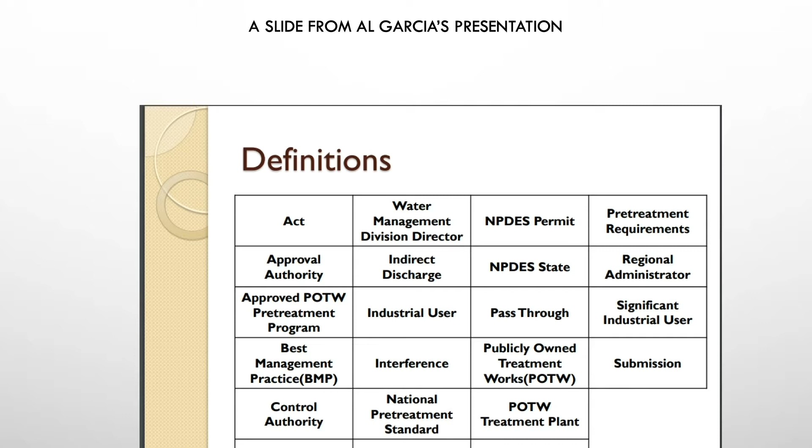A little disclaimer. Like I said, we've been monitoring, as far as I can tell, from 1991. It might be later than that, but I've only been with the city of Bismarck from 2006 on. So I try not to talk too much about things that I wasn't there for. This industrial user has always been cooperative. And they actually asked us to write them up for an NOV because that was going to help them to go to their headquarters and say, hey, we need to improve treatment.

They were a little hesitant when I asked if I could use them as an example, and I've made as much effort as I can to keep their name concealed. If for some reason I missed it, I noticed that there's one place where it says it on the top of the gray out. I apologize for that if you guys see that. And like I said, Bill's going to have some input, and I'll call on him.

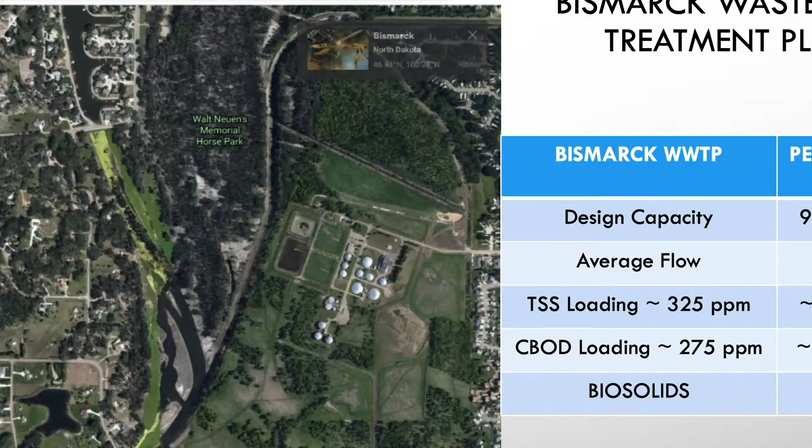So a little bit about the Bismarck wastewater treatment plant. Our design capacity is 9.3 MGD. You can read it. The loading, CBOD loading. We do our biosolids and land application. You can see the Missouri River, I think, along the upper part of the slide. Here's the treatment plant.

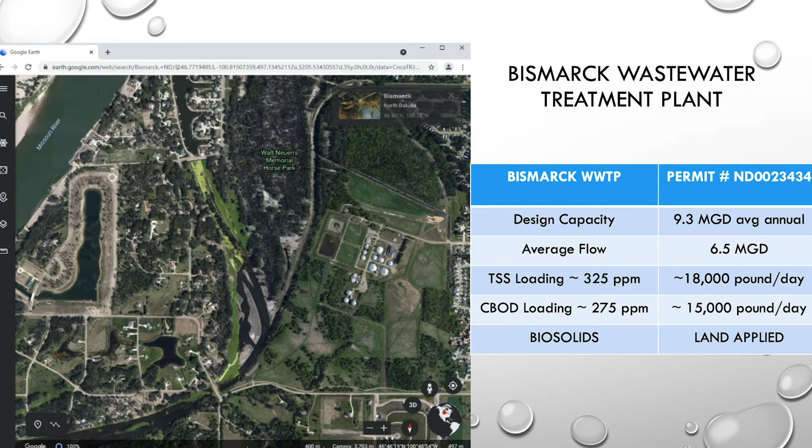And I just did a quick search. The Missouri River gets its flow from the Garrison Dam. So Delron, that's where we were fishing. The Garrison Dam releases about, today, 13,600 CFS, which is about 6.5 million gallons per minute. We got 6.5 million gallons per day. So you can see we've got a huge receiving stream. I would imagine some of you would love to have a receiving stream similar to what we have.

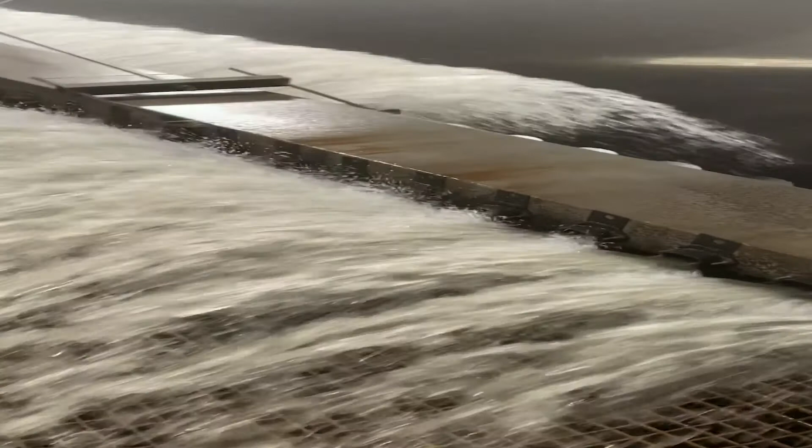We use trickling filters, and of course this slide, well, it'll play. It should play when I turn it. There it goes. So this is a trickling filter. Show of hands, how many people in this presentation do not actually work at the wastewater treatment plant?

Okay, here's my lame joke. Not relevant, not elephant relevant.

Well, it's relevant because you need to know how your treatment plant works, how your discharge permit is written, what your ordinances are, because that helps you when you do your permitting for your industrial user, because it all comes back to that. So how does it relate to 403? Talking about the 25,000 gallons per day or more. Of course, we all know that. And the 5% loading and all the other categories. But if you don't know how many million gallons of water your treatment plant gets a day, you don't know where you're at on the percentage, your loadings and those kinds of things.

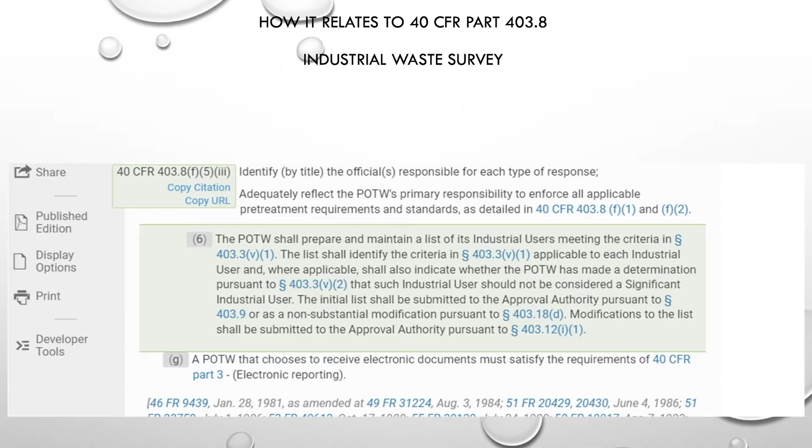Of course, you have to develop a pretreatment program as required by 403.8, which is why we're all here. If you didn't have a pretreatment program, you couldn't enforce any action on an industrial user, right? If you didn't have a city ordinance, you couldn't enforce limits on an industrial user. So you have to have that legal authority, as it was in Al's presentation. And of course, you have to do your industrial waste survey as required by 403.8 F1 and F2. I wasn't going to go that far down, but Sarah got us started on that.

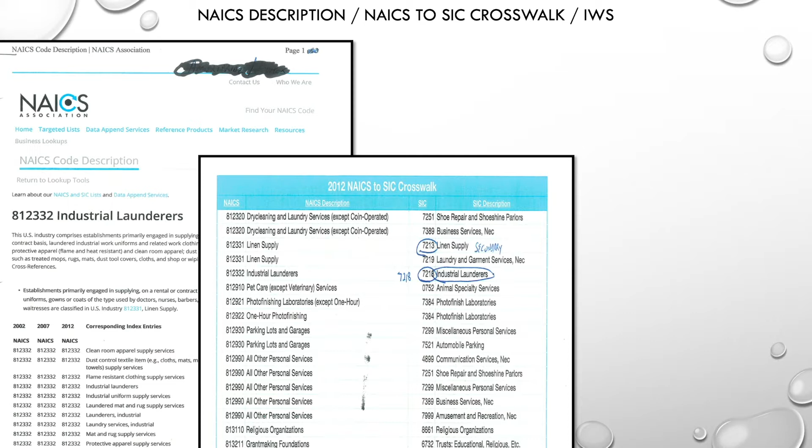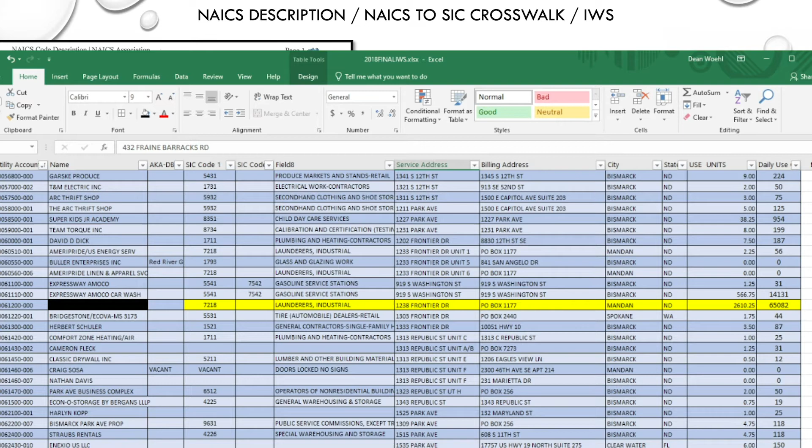So let's look at an industrial user. Here's an industrial laundry, and that converts to a 7218. And this is our water billing. So this is my industrial waste survey showing that they actually use 65,000 gallons of water a day. That's water usage, not water discharge or process discharge, but it's pretty close. So of course that's greater than that 50,000 that Adam showed you, and it's greater than 25,000. So that means we have to monitor them.

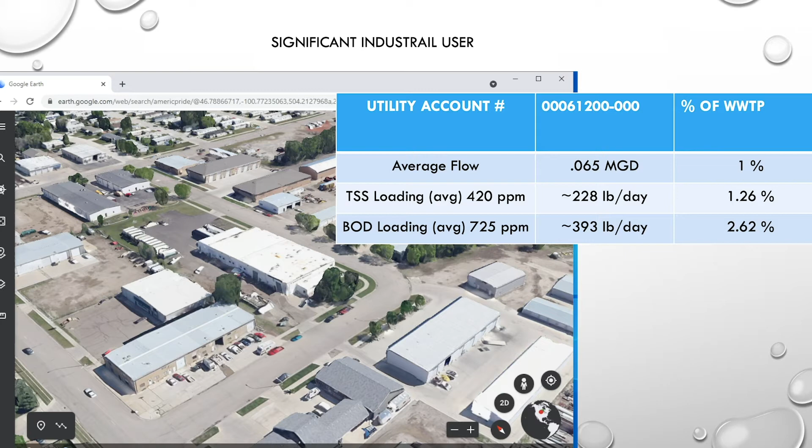And here is significant industrial user, Anytown, USA. Their average flow is 0.065 million gallons, which is 1% of our flow. Their average loading is about 420 parts per million, which is about 228 pounds per day. Still, 1.26% of our loading. Their BOD, I should stand over here. Their BOD is 725. This is the 5-year average, which is about 400 pounds a day, 2.5% of our loading.

And of course, we issue them a discharge permit, just like we have a discharge permit to the river, your standard boilerplate discharge permit, with their limits, including the nonylphenols and their lead and coppers and cadmium, chromium. This is all out of our city ordinance and from our local limits sampling and local limits development.

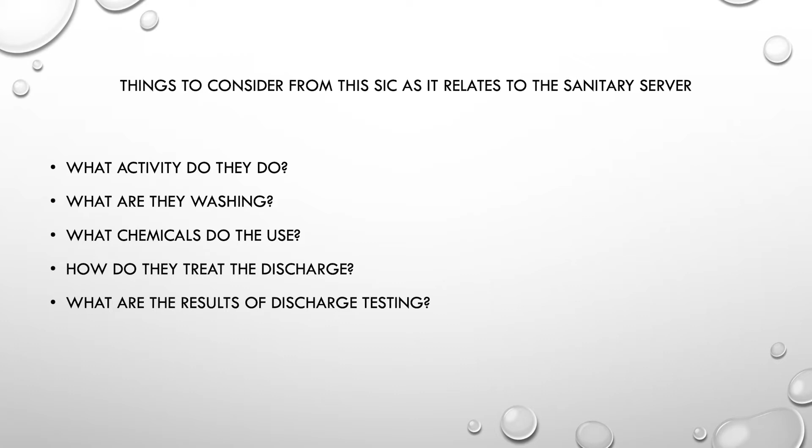So things to consider. This is kind of similar to Adam's third slide or so. What activities do they do? What are they washing? What chemicals do they use? And how do they treat their discharge? And what are the results of their discharge testing?

So doing your inspections, of course, we're looking at their processes, how many pounds of laundry are they washing. And this is going to come from your yearly inspections. There's a reason you're supposed to do your yearly inspections. There's a reason why your discharge permits should only last 5 years. Because if you find something of concern in your monitoring, in your sampling or your inspections, then you might want to include that in your discharge permit.

We're looking at their chemical inventory. Of course, I'm not expecting you to look at all this stuff verbatim. But what do they use? How much do they use? How much do they have on hand? Thousands of gallons, hundreds of gallons, 30 gallons. It all makes a big difference.

Slide, come on. Slide's not working.

Spencer, my advancer's not advancing.

So looking at their safety data sheets, looking at what the toxicity is of the chemical. Of course, you guys all have experience looking at data sheets. So this product, this Aqua Mop, is actually a chemical that they spray on the bottom of the mop heads. And it's an antibacterial product. So antibacterial product, well, what was that we were treating our wastewater with? Microorganisms.

So, start doing some toxicity calculations. What's the concentration of the product? If they were to say spill 200 gallons of that product, would that affect your trickle filter? Would that affect your activated sludge plant? You got 6 million gallons of water coming in a day and they spill 200 gallons. Do the math out and say, yeah, they would kill off our plant. Plus you might want to consider a safety factor because all that flow is not going to come over the course of one day. It's going to come in the course of an hour or so.

Who did that presentation on color? That color came in and went out. If they spilt a 30-gallon tote of antibacterial chemical, it's going to come in and go out in a couple hours, and that could be bad. Something like this is pretty toxic to the Ceriodaphnia. Of course, I don't expect you to read that. But just be aware, you're looking at your chemical data sheets for spill control and your pH, as we talked about when we were looking at amalgam separators and line cleaners.

And the regulation said that they can't use an acid or an oxidizer. Looking at some of the chemical data sheets, they're using hydrogen peroxide. Well, those two concepts don't mash. So let's look at the products that these guys wash. They're washing mop heads, and these are overalls used in the oil fields.

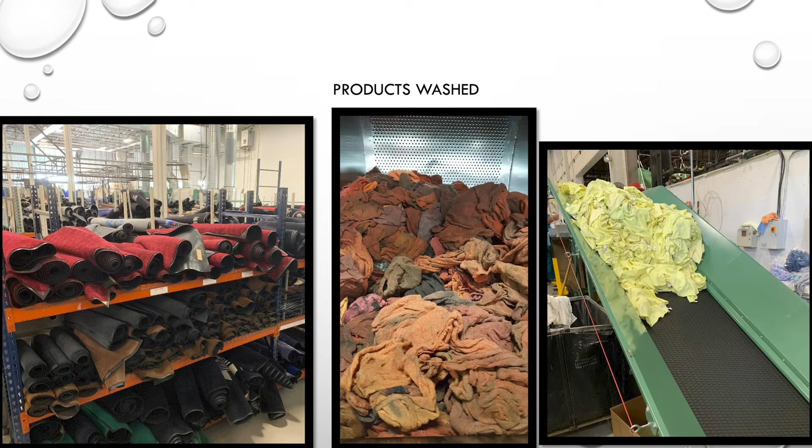And of course, if you're wearing a uniform in an oil field and washing it in a washing machine, you're probably going to see some oil. Just some shop towels, some hotel towels, those kind of things. Floor mats, a lot of sand on the floor mats. These are shop towels, oilers, as they call them in the industry. They also referred in that discoloration in the wastewater presentation about inkers, or the ink rags that they use in the printing shops. So you can see how some of our presentations have some overlap, so that's kind of nice. Some more towels.

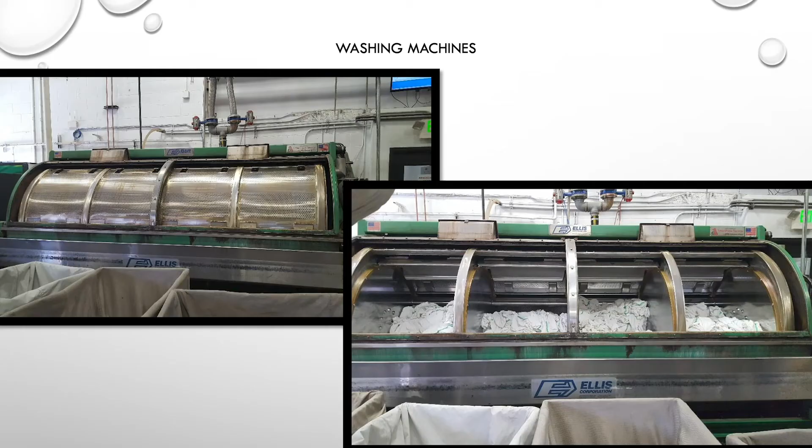And then they're doing uniforms. You can see uniforms hanging up. Pants. In fact, this company does the pants and the shirts and the uniforms and the towels and the rugs that the city of Bismarck uses. So we kind of want to have a good working relationship with them. And then they use washing machines. And these are not your mom and pop washing machines or even the washing machines you find in hotels. These are big. And of course, this is open with hotel towels in there.

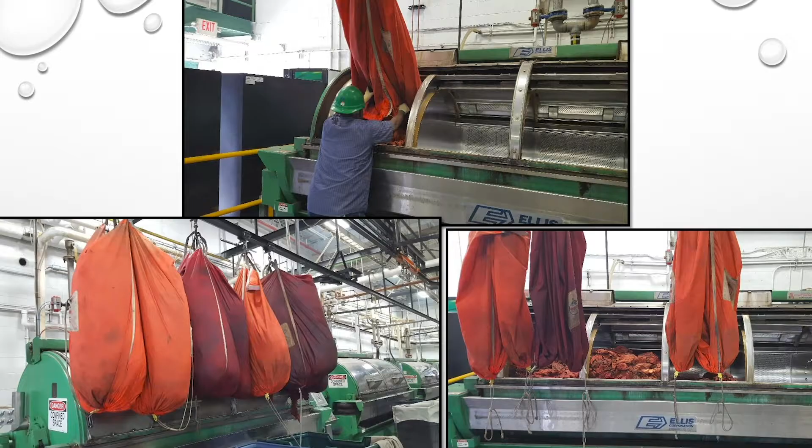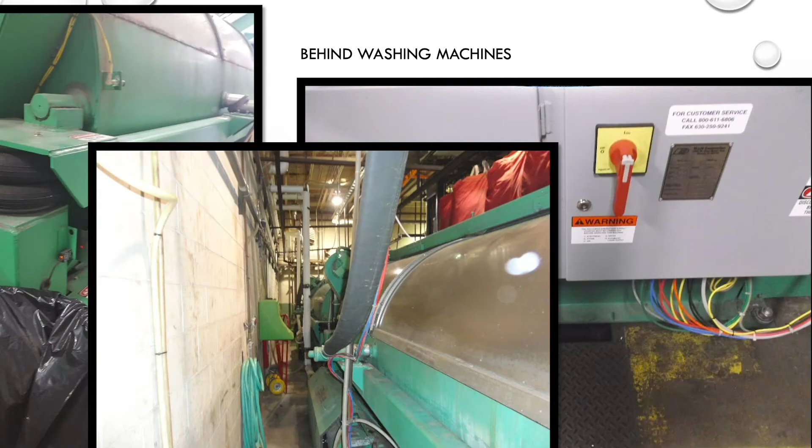Those are 250-pound totes. So there's 1, 2, 3, 4, 5 of them. So they're washing 1,250 pounds of product, and they front load them. These are those shop towels. And then I want to show you behind the washing machine because this is going to be significant coming up. So the water actually discharges through these floor drains and then into the treatment area, which is kind of just a sand trap, or that's where we do our sampling. But you need to see that before you can get further on.

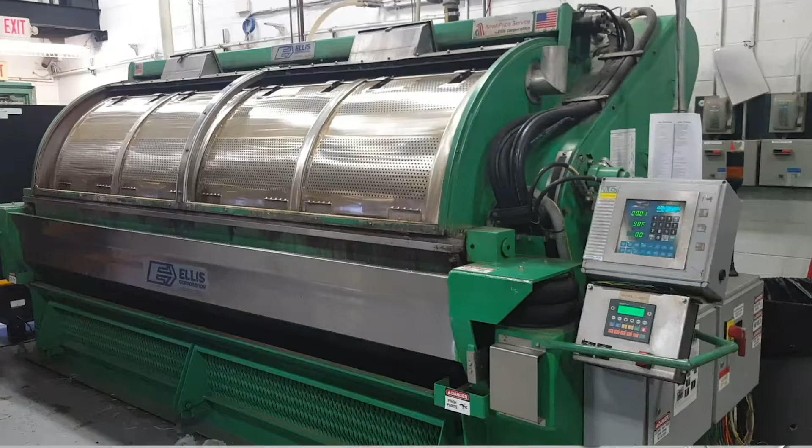When I get further on, this is the dryers. There's really not much to talk about in the dryers. They're just drying. It doesn't really affect the waste stream. And then these are pressers and folders. And then I like to show videos. Hopefully this will play. I like to video record my industrial users because it helps you to more understand how they operate.

There's a guy walking around. I tried to keep people out of the screen, and then this automated folding, automated hanging. So they try to do as much hands-off as possible. Again, some of these are limited because I tried to keep personnel out of the picture. You can see I asked the industrial user how many of those totes do they have, and he had no idea. Over 5,000, he thought. So they do a lot of washing. What did he say? 135,000 pounds a week. So that's a lot of laundry.

So let's talk a little bit about the chemical inventory. You can see there's a 1,000-gallon chemical storage. This is actually in a room that's got no floor drains, so spill containment. Here's some 55-gallon barrels. You see they're on spill containment devices, and these are in their storage area, but they have a lot of chemical. It's chemical everywhere. Another, I think that's a 1,800-gallon storage container.

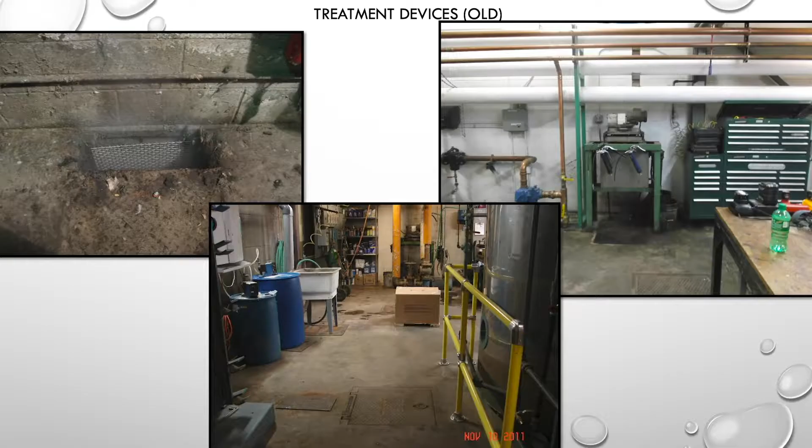So let's talk about the treatment devices. Where it discharged behind the wash machine, it actually goes through this floor drain. And there's just a screen, and that's supposed to catch, like, if any rags go through the wash machine and come out the end of it. And then it actually discharges into the back of the building.

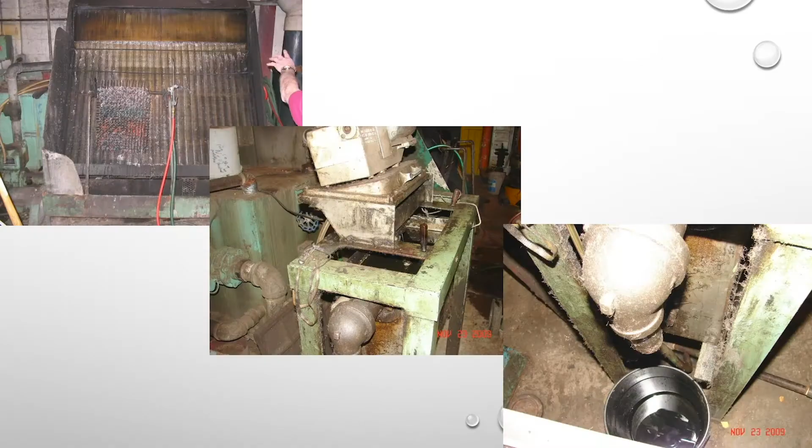And this is a sand trap. Well, kind of a sand trap. It's 8,000 gallons, and we'll talk more about that. And then they have an oil skimmer on there. And this is kind of an old treatment. They've changed their treatment over the years.

I think in about the early 2000s, they kind of removed, this is a lint screen that keeps the lint out of the water, and they have an oil skimmer on there with a hose whip, and it skims the oil off. At least it's supposed to skim the oil off. Or what should I say, they attempt to get the oil out of the water.

So this is kind of a drawing. How do you like my penmanship?

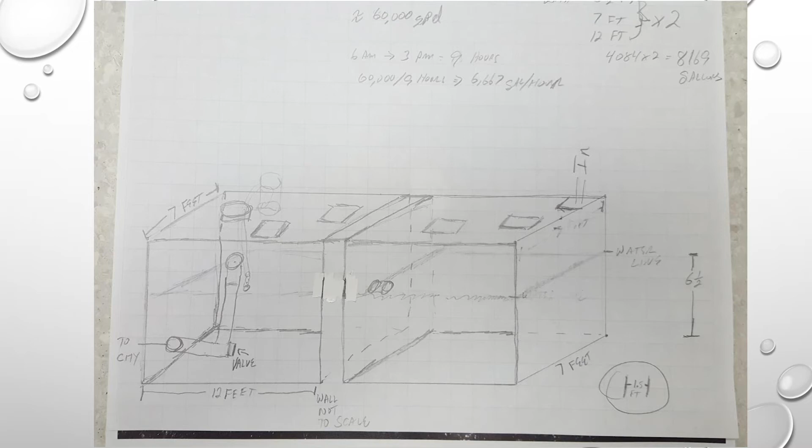This is a drawing of the sand trap, and unfortunately I don't really have a good picture of it, but basically it's 8,000 gallons of water. And remember I said they use about 60,000 gallons of water a day. Going back to the inspection, they're actually only washing for about 9 hours in the day. So they're discharging quite a bit of water into an 8,000-gallon tank.

If you do the detention time, I think it's something like 10, 15 minutes of detention time. Is Ed Lauch in here? He's not. I would venture to guess that they're not really removing any oil in that detention time. And it used to fill up with sand pretty quick, and they were pumping it out. Adam, are you still in here? Yeah, they were actually pumping that out quite frequently too.

And I was just talking to a guy. He's got a car wash, one of these big drive-through car washes. He's got several of them, and they bought their own vac truck. So you might want to suggest that to that company. Buy your own vac truck. It's cheaper, right?

So issues from Anytown, USA industrial user. Interference and pass-through or obstruction, numerical exceedances, narrative exceedances, failure to sample, late reports. Well, failure to sample, I suppose, that could be bad. They might not want to be sampling for a reason, but late reporting, sometimes what happens is you get new management in, or the guy that used to do it quit, and nobody told the next guy that you need to do it.

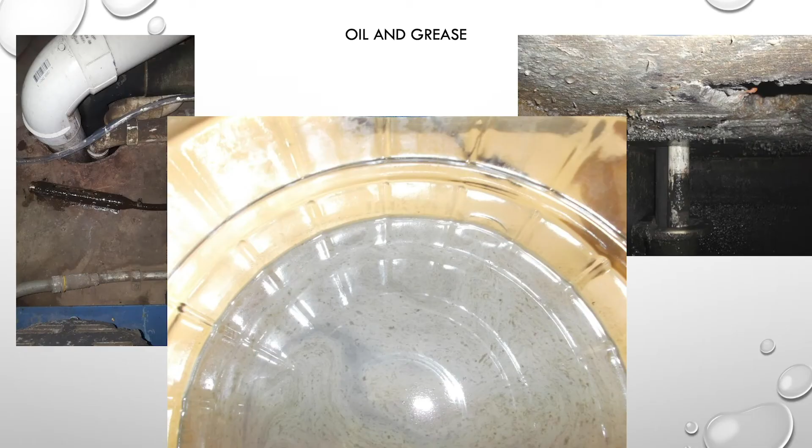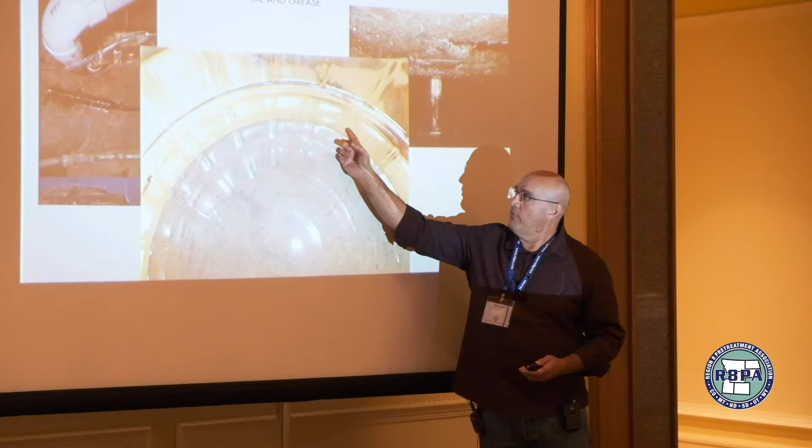So getting back to that oil and grease - this is what the underside of that sand trap looks like. You can see there's some oil on here, there's oil up here. This is actually where the water goes out of the sand trap, and there's oil accumulation on it. This is the inside of one of the GLS sampling bottles, and there's oil floating on top of it, there's oil floating around here. And here's my strainer covered in oil.

Now, when I first started doing restaurant inspections, one of the old-time health inspectors, because we work with other agencies within the city, told me if you go into a restaurant, the first thing you want to look at are the light switches and the ceiling vents. Because if they're neglecting the light switches and the ceiling vents, they're neglecting a lot of other things. And if you're seeing oil on your strainer, there's probably oil going down the drain.

Who asked about the oil and grease sampling?

So if you're sampling for oil and grease 3 hours after they've discharged their washing load with oil and grease, you're not going to capture it. So you have to do your sampling during the time period where they're discharging their water. Again, that comes back to understanding, when you're doing your annual inspection, how are they doing their processes? When are they washing what types of loads, especially for this industrial user? Or back to Adam's presentation - when are they draining the blood, and when is that coming out, and how are they doing that? Or when you talked about when they're doing their cleaning - if you sample when they're doing their cleaning compared to when they're doing their blood draining for a grab sample such as pH, or the coke crushing - if they're not crushing cans when you're sampling for pH, you're probably going to be okay. So you kind of have to understand what's going on.

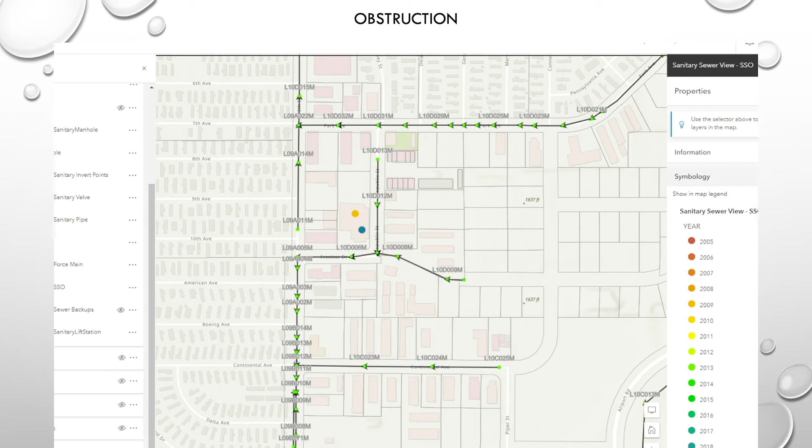So let's talk about that obstruction. This is our GIS technology that I start looking at, and this is the industry right here. In 2009, or 2010, we had an obstruction from our jetting crew.

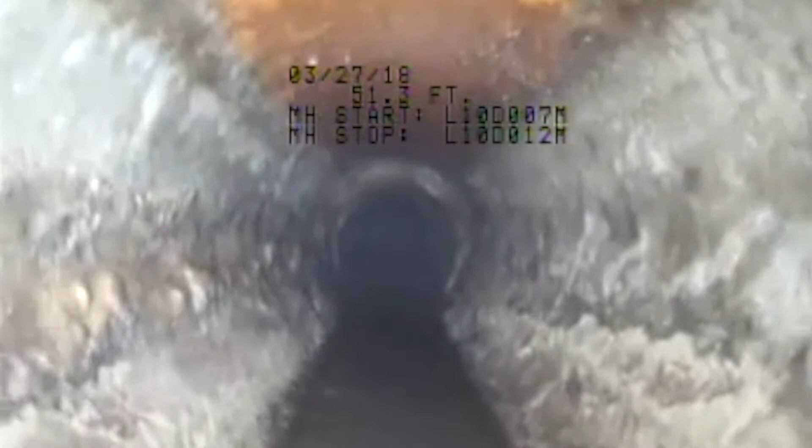This is the detailed view, this actually shows their name in there, so I won't go too far. This is that line. You can see our manhole 7M, manhole 12M, and manhole 6M. I put that on there so you can see, this is looking north. Let's play, going from 7M to 12M, and you can see obstruction, calcification.

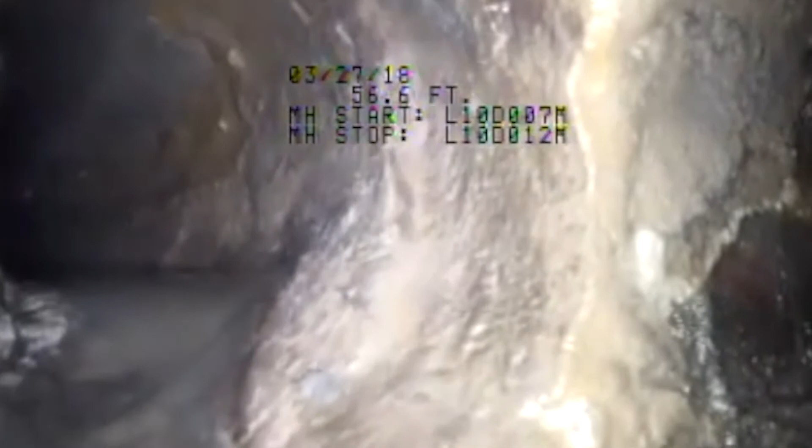This is after the jetting, and this is coming out of their 6-inch pipe. You can see there's some obstruction going on in there. I had to edit these movies down because otherwise it was going to be way bigger than we could allow.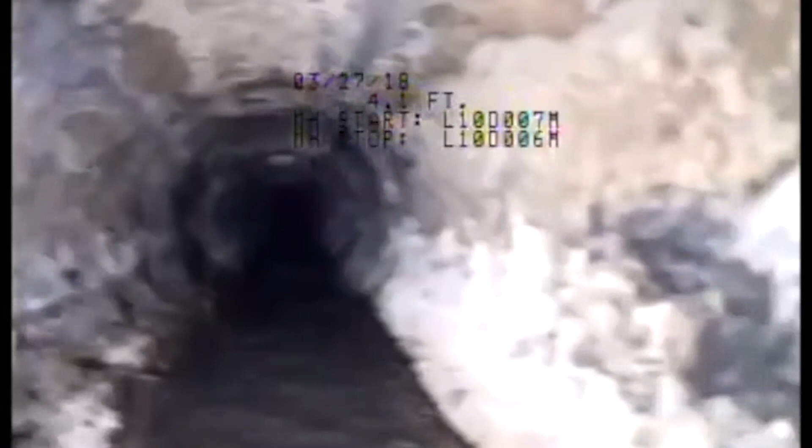This is going west in 2018. Again, this is after jetting, and there's still buildup on the side of the line after the jetting, and they go in there with a cutting tool.

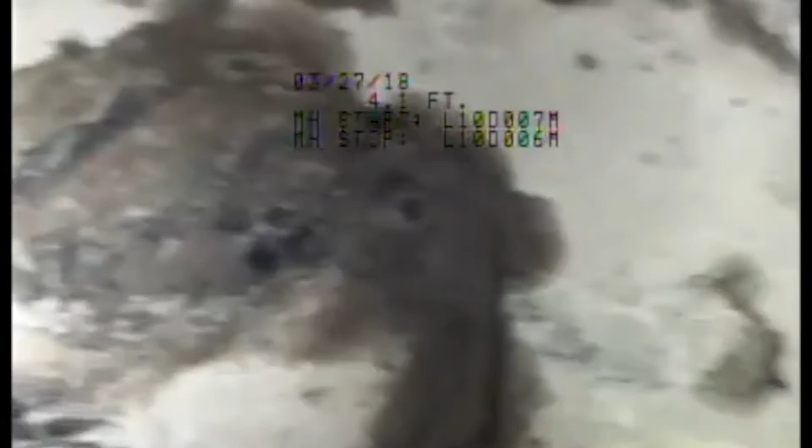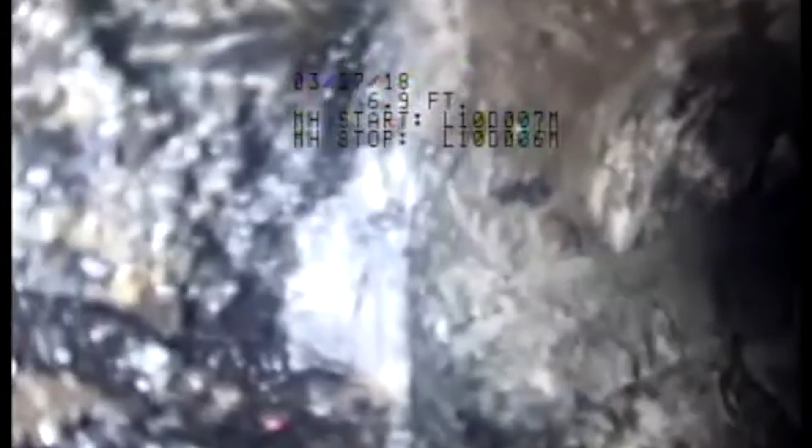So how many of you guys actually look at your jetting videos? How many of you work with your collection staff and say, who are you having problems with? That's important. I quite often get phone calls and emails from the jetting staff asking, have you looked at these guys? This is what we're seeing in this area. You can see buildup of lint.

I really think this is kind of like how your non-dispersibles mix together with your fats, oils, and grease. The oil and grease from this industry is mixing together with the lint, and it's coating up. But also calcification is going on from the soaps that they're using.

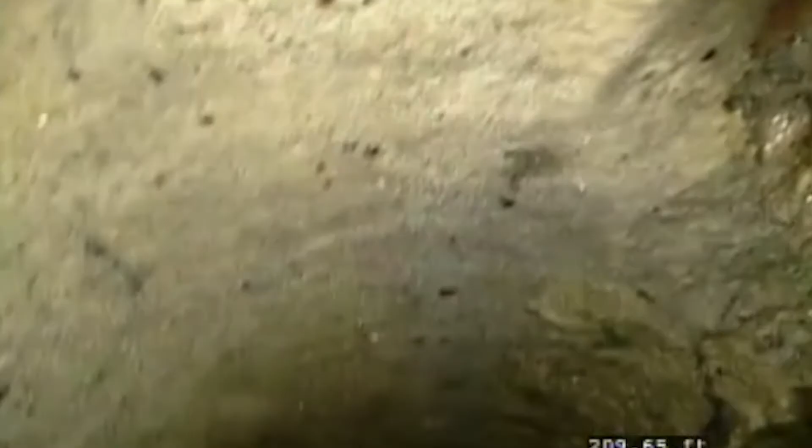This is in 2020, and this is coming south, so that's why the flow is coming from the other direction than this one. Now we're going to pan over to... oh, they did that already, I missed that. You can see there's the obstruction, and it really isn't much better.

You can see the buildup. This is an 8-inch line. So again, NOV for causing obstruction - this is the narrative violation as opposed to the numerical violation, which was the BTEX. So hey, we said you got to do something, right?

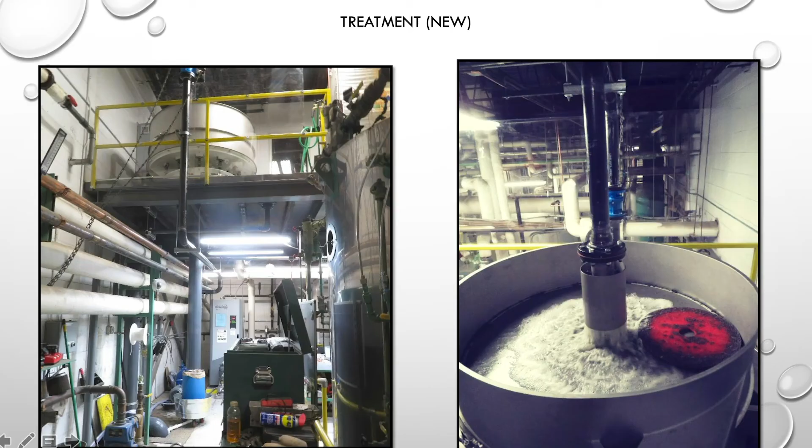What they did was they installed this shaker screen. I didn't get a good video of it, but basically they pump the water out of the sand trap down here, and pump it up into this rotary shaker screen, which pours it in here and then pushes it back down. I didn't do the treatment justice, because they capture that sand and grit, reducing a lot of the solids, which is supposed to help the treatment device work better.

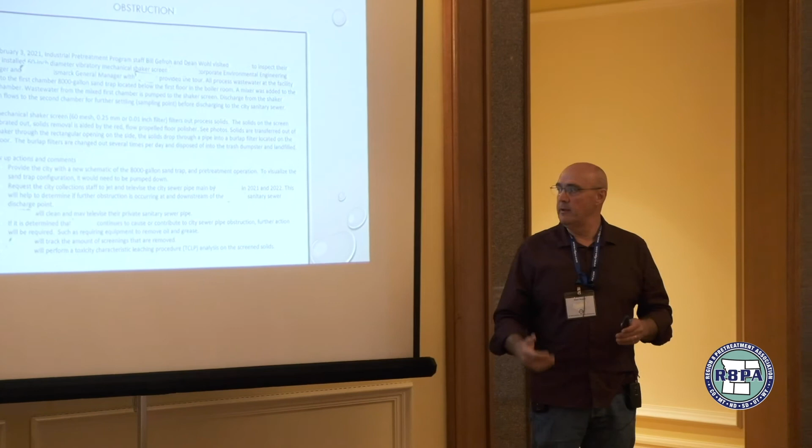This is part of the narrative that Bill mentioned, and we kind of have an action plan. This is what we saw, this is what you did, and we're going to continue to televise in 2021 and 2022, because when you do something, the effects aren't always immediate. So we're going to re-televise in '21 and '22 to see if it has improved or not, and see whether further actions are required. Sometimes, like shipping off the shop towels, that was immediate.

Adam was talking about money.

Industries don't like to waste money, and neither does this industry. When I first went out and looked at this industry, it was kind of like a dungeon. Then they brought in a new environmental engineer who really did some amazing things, and that place is pretty clean now, especially in the back boiler area.

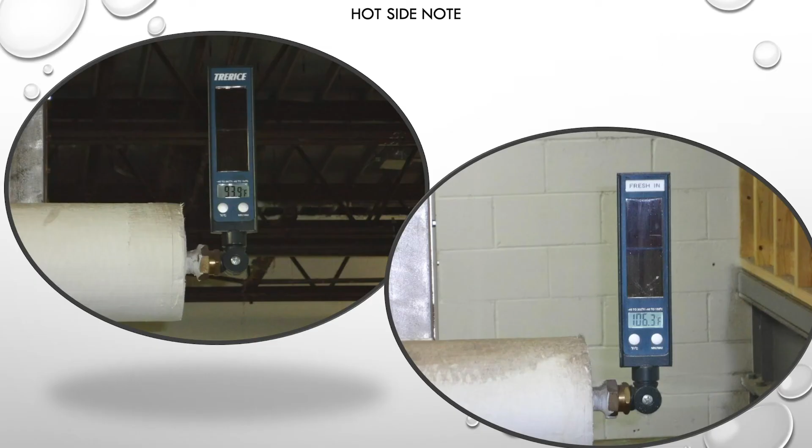Can you see these temperatures? 94 and 106? They used to just bring in their water, heat it up using propane or natural gas, wash clothes, and send it out the back door. Then this engineer came up with the idea to pass the outgoing water against the incoming cold water. Our incoming water is 45 degrees from the water plant, colder in winter, warmer in summer. So they're heating that water from 45 to 94 degrees for free. Then they push that water over the top of their boilers and heat it up from 94 to 106 degrees, free. Free money, right, Adam? That's what industry likes about it. So that's just a hot side note.

So like I said, we had that oil and grease problem, and they put in an oil skimmer, which isn't very effective, but it looks better. So there's an issue, and there's a solution, and that solution is up to the industry, right? They just have to meet our limits. So treatment was the solution to the first problem, and for the NPE, the solution was product substitution.

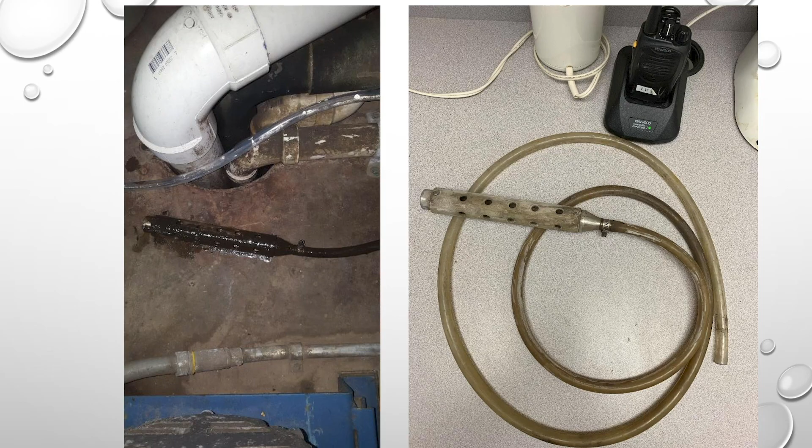Remember that first picture I showed you of that sampler with the oil on it? This is exactly the same tubing with a brand new head on it. After their treatment with their shaker screen, that strainer is clean—well, I mean it's just sand down there, so it's not much.

Will the issues continue? Probably, but it might be a different issue—we don't know. Was the treatment sufficient? Maybe, we'll find out. The SIU actually asked me, when I was talking to one of the guys, he said, when can we start resuming our shop towel washing? I said, well, we didn't tell you that you had to stop. So I don't know, that hasn't been resolved. They haven't started yet, as far as I know. Bill, did they ever talk to you about that? Nope.

So how much time do we have, Adam? Am I on time? Fourteen minutes. Yeah, well, we're a little...